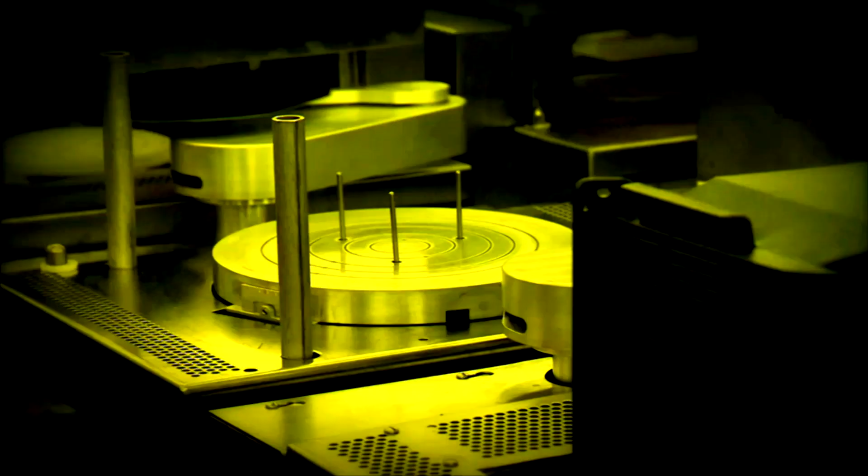Please welcome Raytheon's Enterprise PDM Director, David Slater.

Wow, that is some serious technology. I just wanted to thank everybody for the opportunity to tell you our PLM story today.

Being great at what we do requires growth in adjacent markets, and that is to get the mergers and acquisitions in order so that we can bring the technology together. Inevitably, those mergers and acquisitions lead to infrastructure disparity, so systems don't talk. The bottom line is: how do you bring these companies together to work as one?

Especially when you have over 39 different geographical locations and dozens of CM systems. How do you maintain configuration control when those systems host over 3 million different change objects? And those change objects have relationships to over 5 million different documents and over 8 million different models.

Imagine the duplication and confusion of trying to manage 7 million different parts, reuse those parts, and you don't have a single platform that you can integrate them all on, especially when you're trying to bring them onto 654 different active programs.

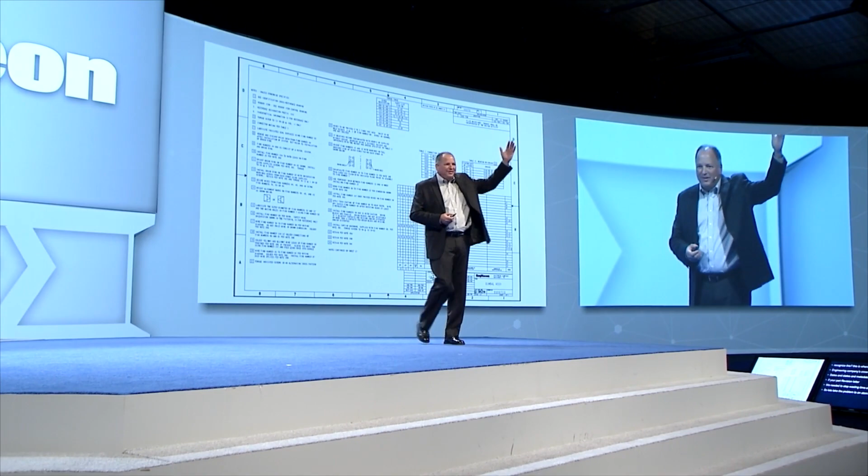So let's get a little more tactical for a minute. Some of you may recognize this. This essentially, for an engineering company, is the crown jewels of the company—this is the IP that we so value.

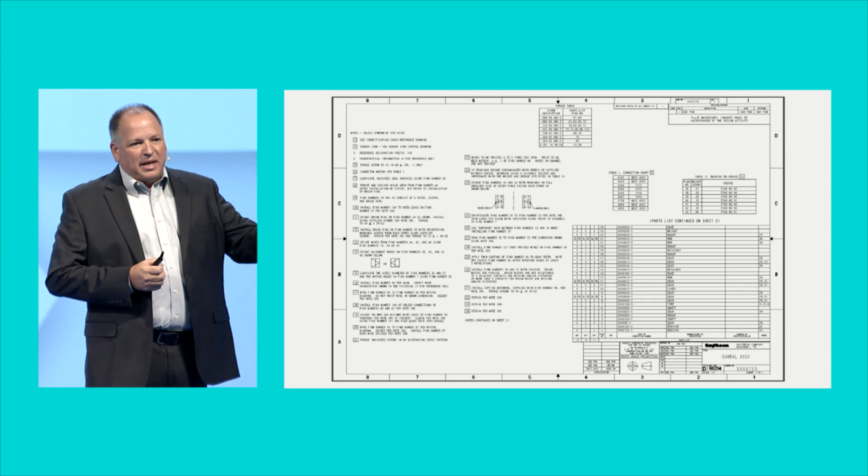A lot of times we relegate a PDM system to just tracking dates and states and metadata. But embedded on this PDF and bound by this piece of paper are really the keys to the entire company.

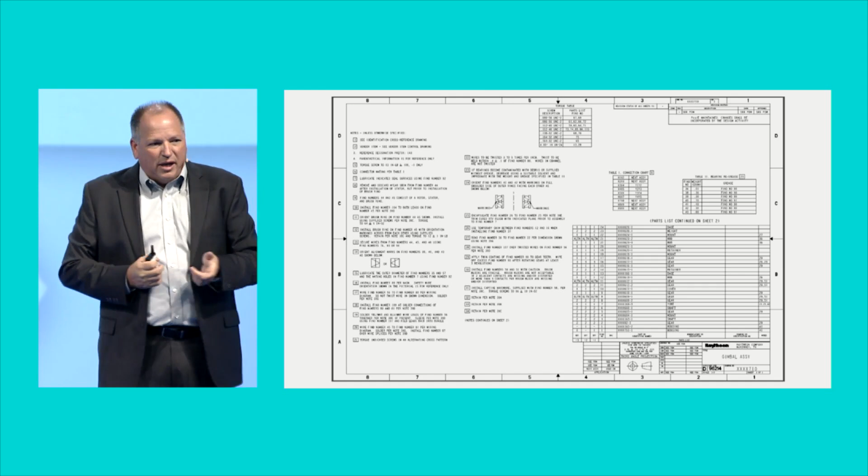So if your revision letter on your drawing matches your revision letter of your part, then you guys are exactly the same place that we were—you're in a paper paradigm.

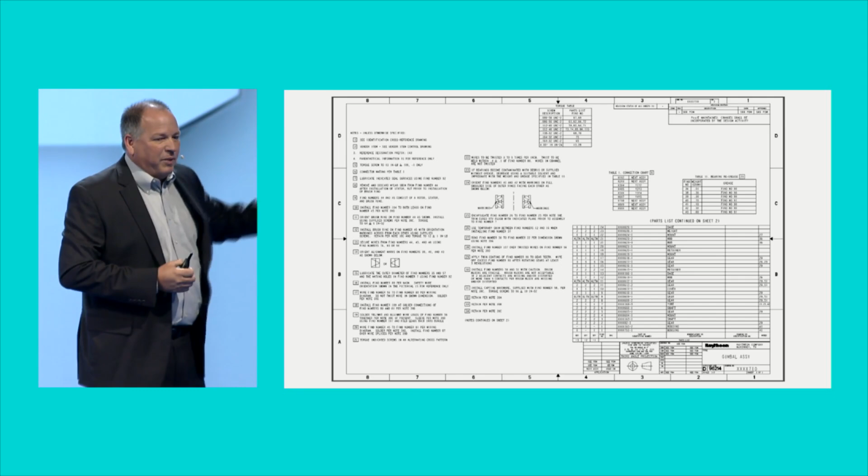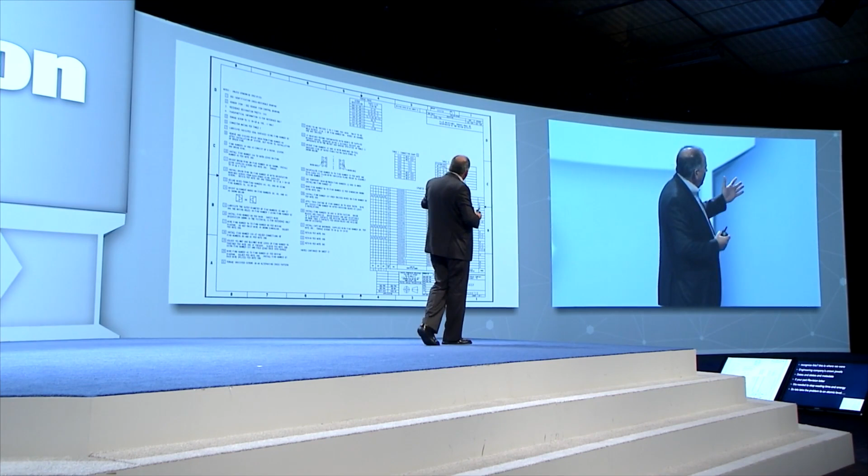And we had to make a move to a part-centric world. So fundamentally, we got to stop wasting time pulling up PDFs just to find out what materials, what notes, what parts, what manufacturing processes are called out for a part.

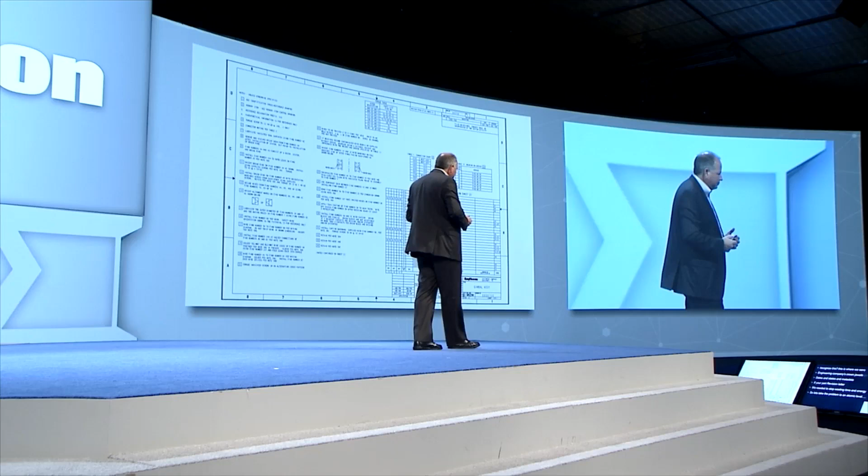So let's take this problem down to the atomic level: the part object. The core of every PDM and MRP system is the part object. That's the common element that will go across your company. So our organization would have to make a paradigm shift from a drawing-centric or document-centric world to a part-centric world.

Decomposing the rich PDF data as part of the object comprehends the file versions of all the objects and the relationships of those. The digital information allows a part-centric view, and it allows electronic transactions of that digital information, and big data resulting in business intelligence.

PDM database is the model—that is the model. And our friends in manufacturing had a similar problem. They too wanted better file control, and they too wanted to connect to the part object and reuse those files.

So bringing engineering and manufacturing together, we used MPMLink. MPMLink allowed the design data to connect to the build data, to connect to the support data. So Windchill is now the single source of truth for everybody.